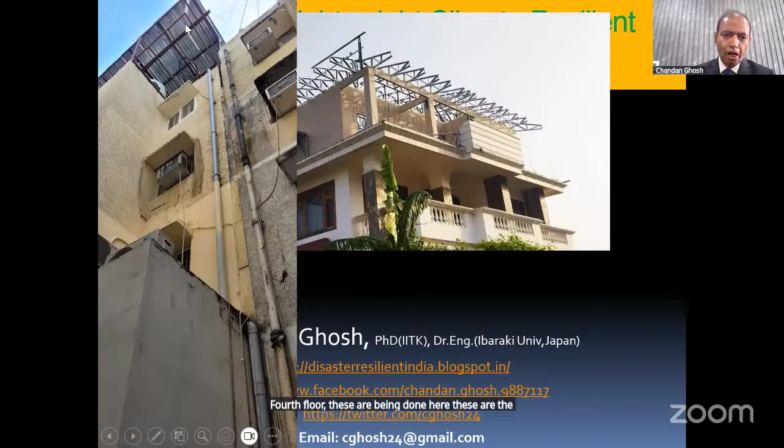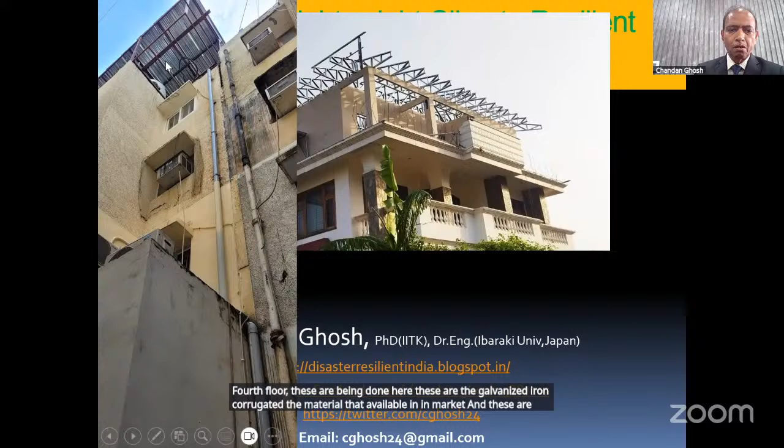Here is an example I'm taking - rooftop means whatever you are seeing over here. Here also, it is at the fourth floor where these are being done. These are galvanized iron corrugated sheet material available in the market, used not only as shuttering but also as a roof.

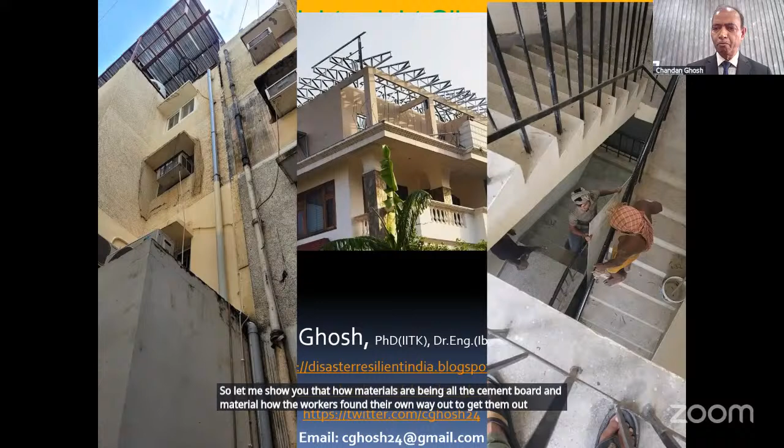Let me show you how this cement board and other material - how the workers found their own way to get them to the rooftop, because from the front side, back side, left side, right side, there is no way to set up a pulley system. So with no other way, they have been bringing this cement board, which is about 10 to 15 kilos in weight, through the staircase, to the rooftop where they have added one floor extra.

After completion, you can see that one floor is added over here, and over that it is a flat roof. And whatever garden and kitchen garden was there is shifted from the floor where this cement board construction is, up to here.

Now let me go to some nature-based solutions that I did myself - I was physically there, in Coorg. This is a portion which had slid, and you can see the building was about to fall down, or it was getting eroded. So we put vetiver grass over there, using the local community and other resources. The date and time mentioned is December 2019, just before COVID.

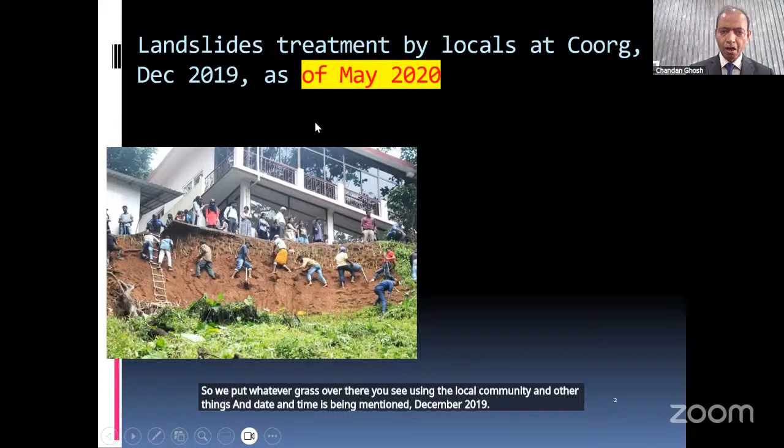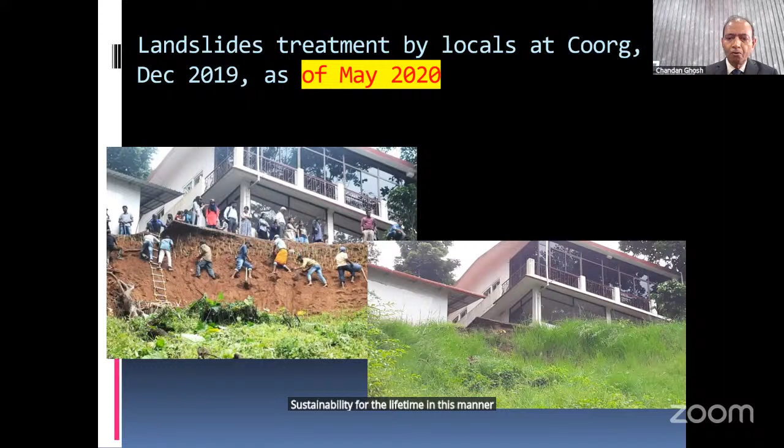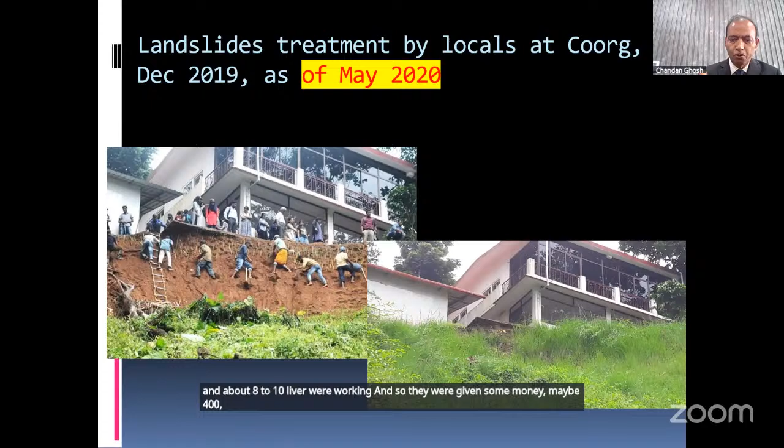As of May, you see how this grass has grown - you can still identify the same building, but see how it has given sustainability for the lifetime in this manner, without spending much money. The grass was donated by somebody, not very costly, and about 8 to 10 laborers were working, given maybe 400 to 500 rupees for 2 hours of work. About 1,000 saplings were planted in this 2 hours, and you see the result - greenery, as well as giving the best alternative to protect this building. Otherwise it would have fallen down, cracked, and everything.

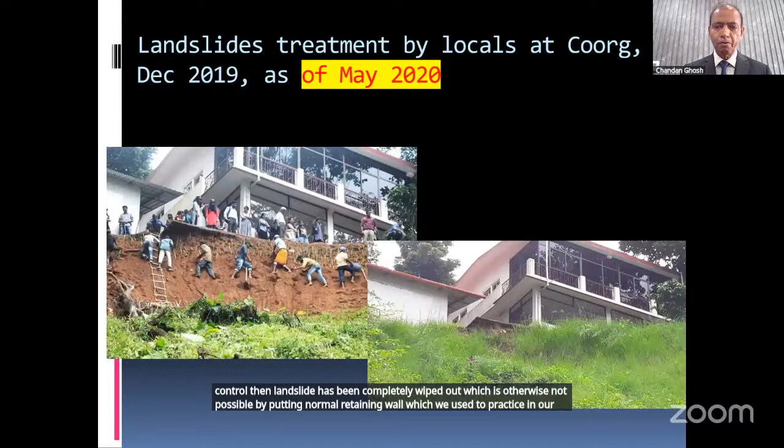So what I mean to say is that this special kind of grass is used to protect this building, which may be costing more than 20, 50, say 30 lakh. But by spending just a few thousand rupees with community help, erosion control and landslide has been completely wiped out, which is otherwise not possible by putting a normal retaining wall, which we used to practice in geotechnical engineering. I want to keep this just for reference.

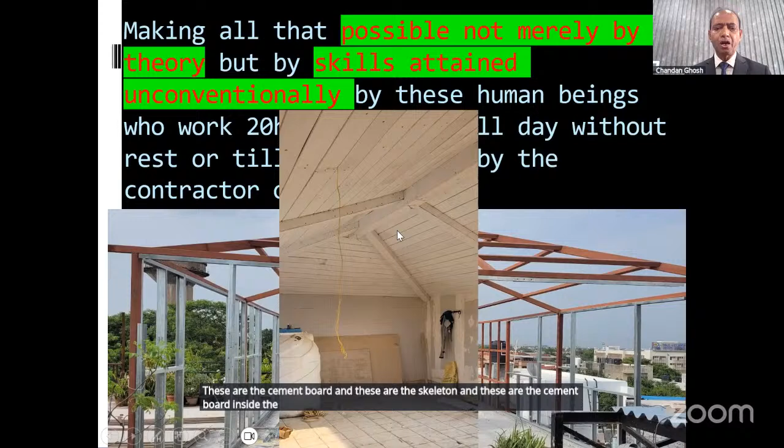And after completion, what is inside is there. You see, it is all cement board. These are the cement board, and these are the skeleton, and these are the cement board inside the building after completion, which took hardly 3 to 4 days to complete.

So while going for rooftop construction, it has to be lightweight, and it has to work in a society where people are already living, so affordability has to be there. It should not be too costly. And there are certain social taboos there, so we have to go not against the taboo, but convince them scientifically how much better it is, and how reliable.

Everybody will ask, what is the cost per square feet, because it depends on site conditions. Especially at the rooftop, it is very difficult. Keeping that in mind, a normal construction in Delhi takes minimum 1,500 to 2,000 rupees per square feet. So this one also costs around 2,000 rupees.

But you get 10% more carpet area. Say for 1,000 square feet, with normal construction, you will get carpet area of about 800 feet. Here you will get 100 feet extra. If you add the cost of that 100 feet, you may see that this becomes cheaper.

So cost, comfort, and no termite issue. It is very fast construction, no cement, nothing like that is being used. It is all welding and cement board, which are customized and available in the market in plenty, made by many manufacturers. Of course, it has to be guided by experts qualified in this field, and you have to choose a contractor or expert who has experience.

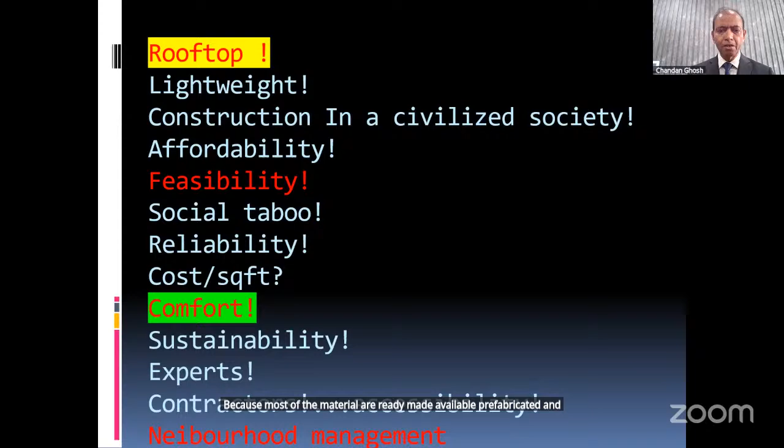Then you can very well manage, because that becomes a big issue. That is why I have highlighted neighborhood management. Because it is fast: a normal floor like this, if done conventionally, will take minimum 1 year, whereas this can be done in 1 month, because most of the material is ready-made, available, prefabricated, and pre-assembled, and only workmanship is required at the rooftop.

So here I want to share something, but time will not allow much. I have interacted with the workers and contractors together for more than 3 months, observing their work ethics and how many hours they work. You can imagine a worker working continuously for 3 to 4 days, 24 hours, taking maybe only 15 or 20 minutes of rest in between. They work 20 to 22 hours a day, meaning they have become habituated to this kind of construction.

But at the same time, you all know how difficult it is to imagine such things done thousands of years back in our country by human beings, constructed from the top, everything in one place. It is a wonder, I mean it is unparalleled.

Now let us see, taking just a few examples, things done thousands of years back, or what I have explained that is recently being adopted by many as affordable and cost friendly. But again, when we go back thousands of years, when so many materials were not available, we do not know, we do not have any connection with how it was made. There is a link between those skills, manpower, and tools that they used, but it is not yet identified.

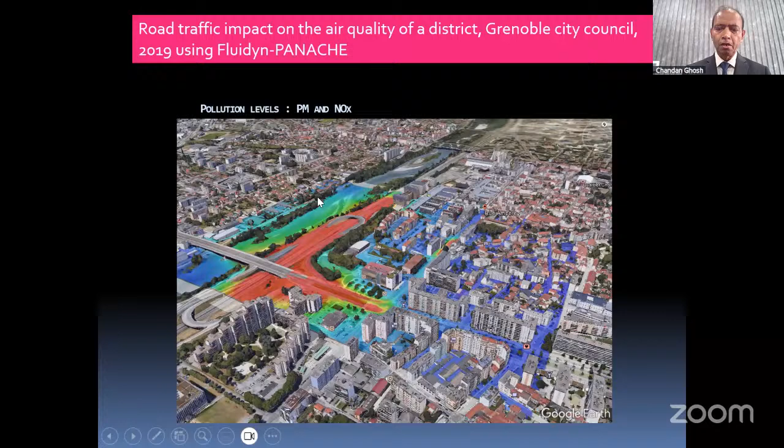We can only imagine. On the other hand, let us go to some of the things we are able to do, like you see, it is in a city area. We are talking about climate change, and we know there are more than hundreds of mobile apps. Taking weather data, we just collate it and show what the climate is today, whether it is going to rain or not.

Somewhere it is going false because we have not modeled them. But we have got the tools here, in the company where I work, so that even knowing how many buildings are there and how many vehicles are there on a particular section of the road, we can categorically identify the AQI, air quality index, or all those parameters along with the sensors placed there. So we can categorically identify which is the most polluted area.

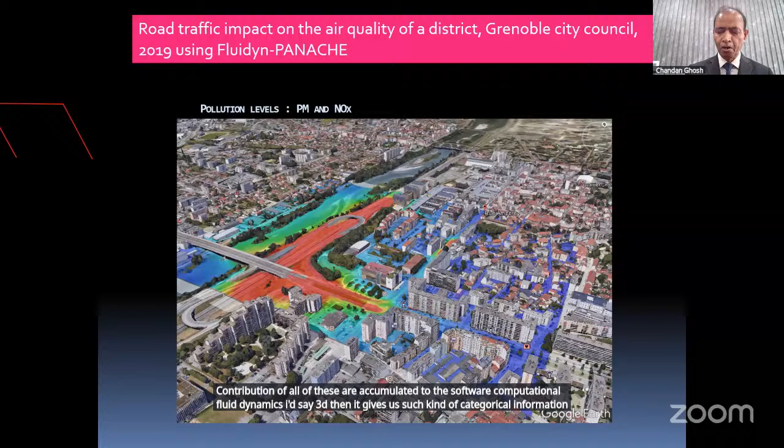And these are all novel exercises, and solvers are available, taking thermodynamics as well as buildings, roads, vehicles, and people movement, like these many multi-towers are there. The contribution of all of these is accumulated into the software, computational fluid dynamics, I would say 3D, and then it gives us categorical information about the pollution load in a society area or whatever you want.

And also this urban air quality, like this is a stadium. Around that stadium, if you want to organize a cricket match where 1 lakh people will be coming, we can give this kind of information in advance: how many vehicles will be allowed, how many people will be allowed. Of course, that depends on the ticket sales, and the time of the event can be decided. And we can give advance information about this 2, 3, 4 days ahead. What are the changes they're going to make?

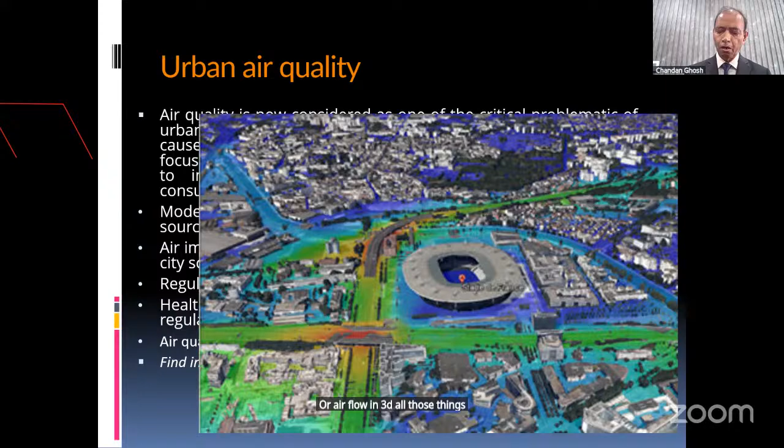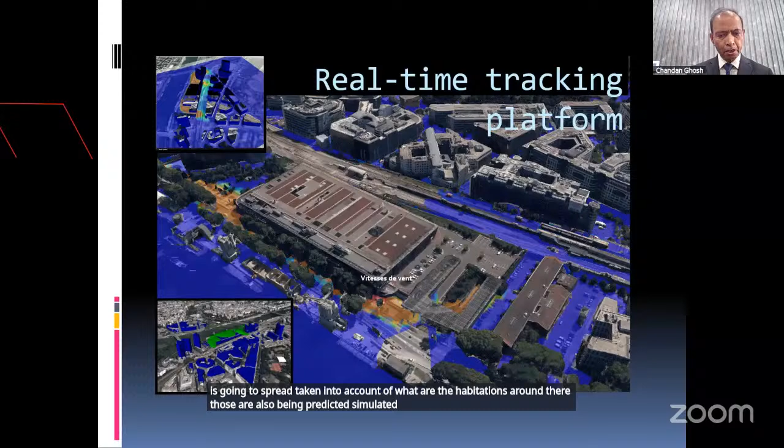Of course, our IMD also gives advance weather forecasting for the next 10 days or long-term forecasting. But this one takes into account day-to-day things, and with computer simulation, we do it more effectively and categorically, and you can verify, you can check, you can put temperature sensors, humidity, or airflow in 3D. All those things can be taken into account, and we can predict. Or when there is a fire in an area, how it is going to spread, taking into account the habitations around there. Those are also being predicted and simulated using the multiphysics domain.

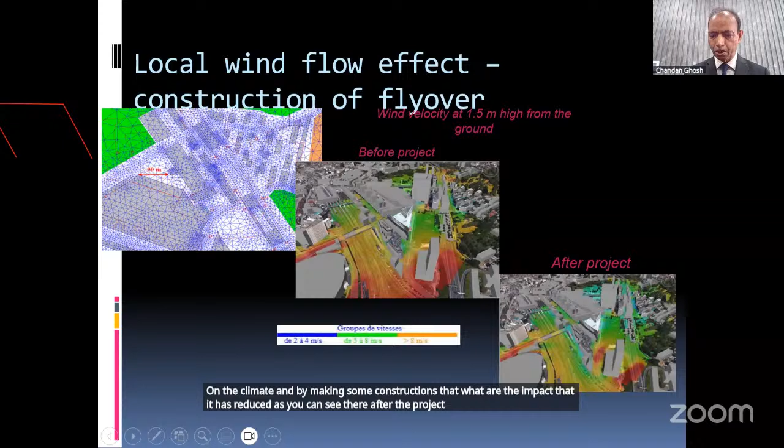Then suppose these are the discretizations that we do in our civil engineering. Suppose there is some pollution over here, and whenever some flyover or underpass is being made, before the project and after the project, what are the changes? So we can categorically see what is the impact on the climate, and by making some constructions, how much it has reduced, as you can see after the project with this color code.

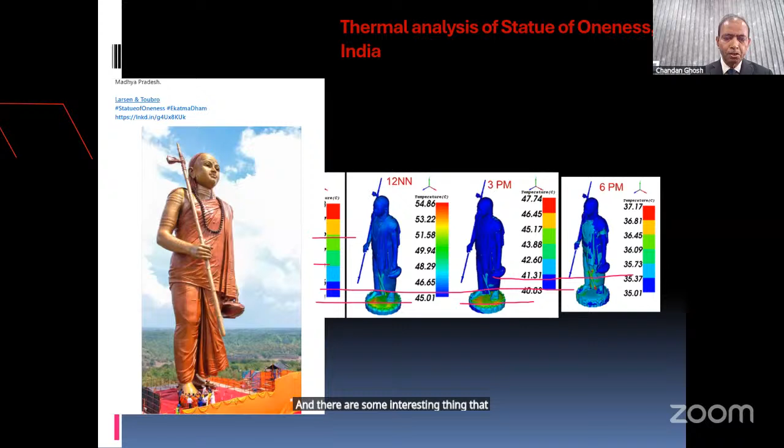And one very interesting example is the statue. L&T has made the Statue of Oneness, and the statue is like this. So we did CFD analysis on the entire statue, and here you see at 6 a.m. the temperature is 30 degrees maximum. At 9 a.m. that temperature becomes 41.33. At 12 noon, it becomes 54.86. At 3 p.m., it has reduced. At 6 p.m., it has reduced. This one indicates the head here. And this gives the distribution of temperature throughout the statue from top to bottom.

So these are the kinds of analysis which are not easily taken up in the structural analysis of such a statue by the structural engineer. But when sun heat and temperature are taken into account, the variation of temperature can easily be measured, identified, projected, predicted, and the change that happens when temperature goes from 30 degrees to 54 or 55 degrees: what will be the impact on the statue, on the material being used, whether it is designed for that or not. If it is not, then what mitigation measures are to be used? Say some cool liquid may be circulated at the top, so that we can keep a balance and temperature extremes are not there.

So I mean to say that in the climate change and disaster mitigation area, we have been using many empirical estimates, statistics of 30 years, 40 years, projecting them for the next 70 years. But all these things are based on statistical information. Whereas here we are taking into account the multiphysics of each and every mechanism, how temperature is going to interact, and then we are able to give this level of discretization of the temperature variation, and what impact it will have on the statue itself, on the life of the statue for which it is designed.

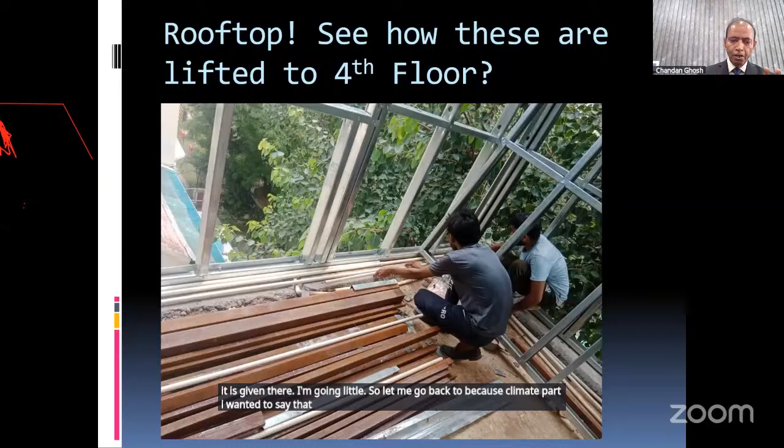This can be categorically explained. And this is from the company side, it is given there. I'm going a little fast. So let me go back, because on the climate part, I wanted to say that we are using statistical information, projecting it for 2070. We are now taking into account, say, net zero by 2070 in India, or how it is going to change in the next 100 years.

In the recent events that are taking place, it is not going to be dependent on what the last 5 years of information is. We have to use categorically some kind of analysis like this, which takes care of each and every part, from kilometer size to even millimeter size discretization, so that we can measure, we can project, we can predict, and we can make some mitigation measures.

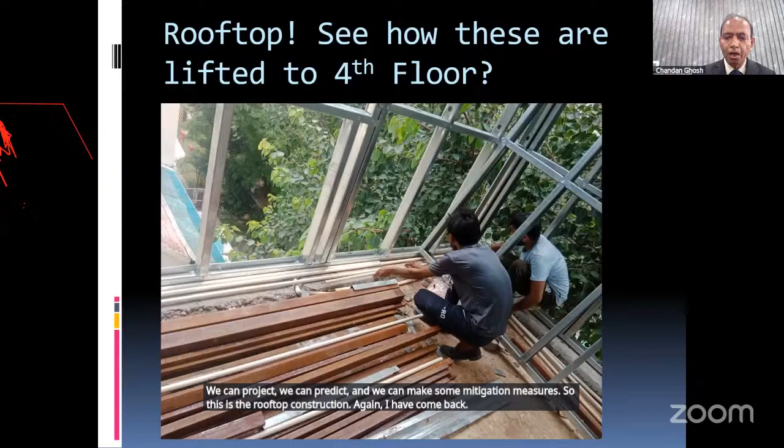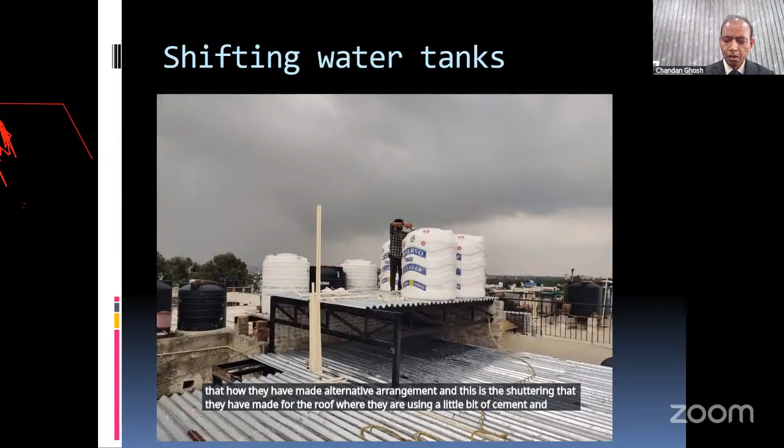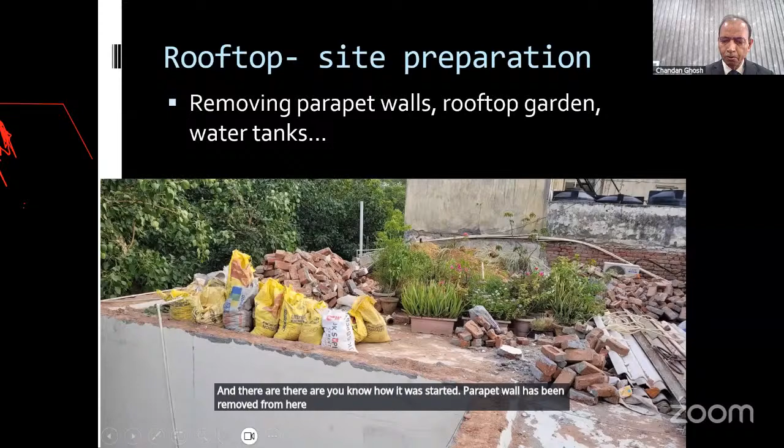So this is the rooftop construction. Again, I have come back to how they have been constructing this in various phases. I'm going a little faster, how they have made alternative arrangements. And this is the shuttering that they have made for the roof, where they are using a little bit of cement and concrete to make the floor, a flat floor. And this is how it was started. The parapet wall has been removed from here. And you see the tie beam has been put up. See, all the parapet, and these are the tie beams put up over there.

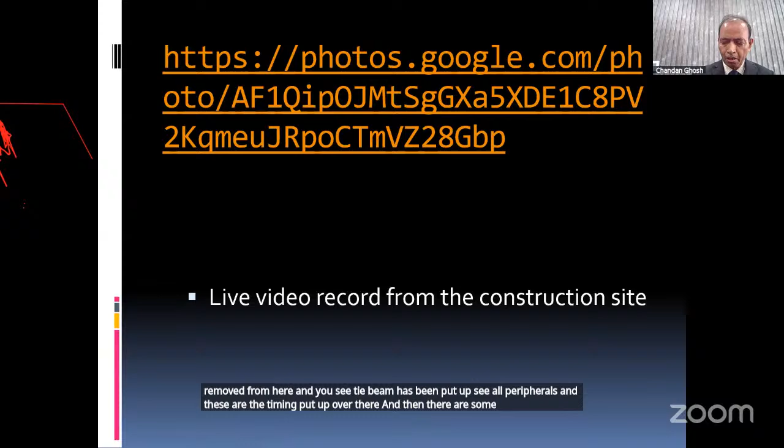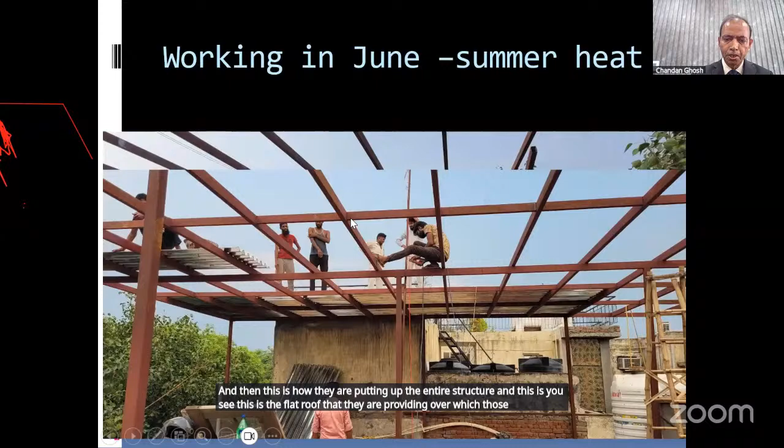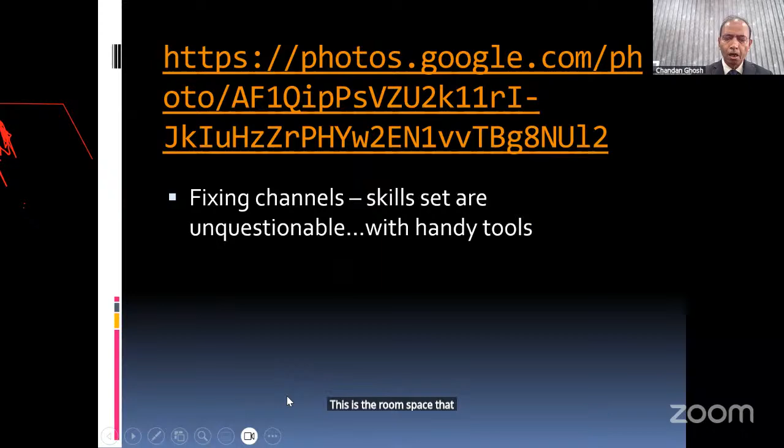And then there are some live videos, but because of the shortage of time, I am not showing them. But these are the kind of connections that they are making, welding especially. And then this is how they are putting up the entire structure. And this is the flat roof that they are providing, over which they are using those tin sheets. And these are the works going on. They do it very fast. And then they have done the concreting over this. This is the room space that they have created. And all the material they have carried manually through the staircase, and all this work that they have done.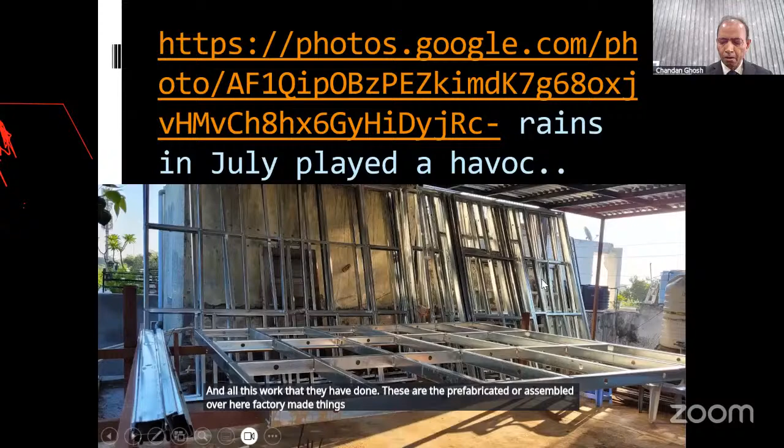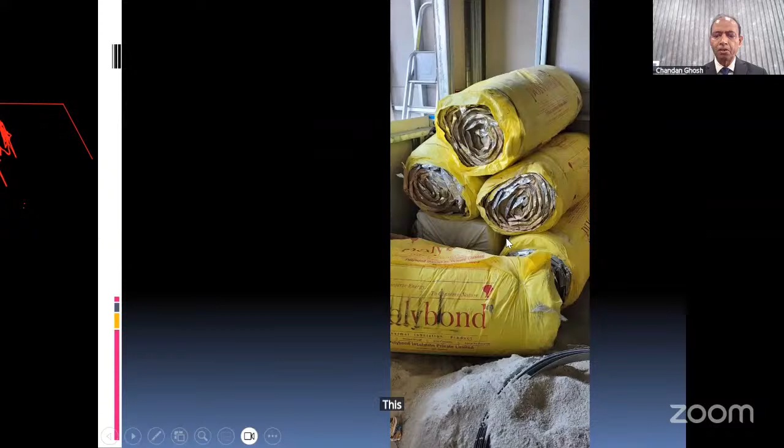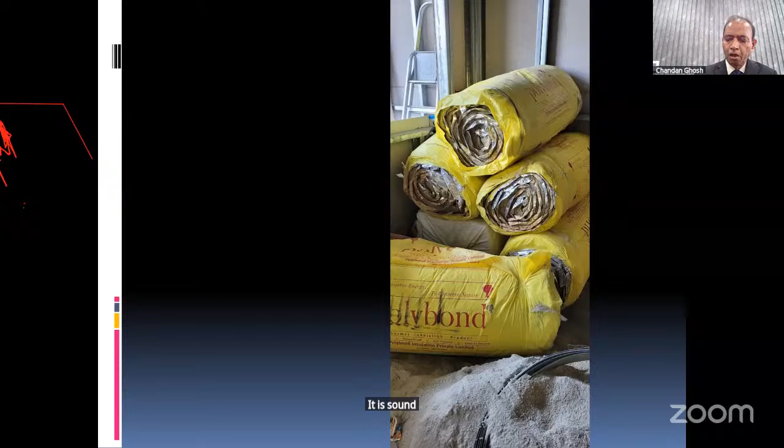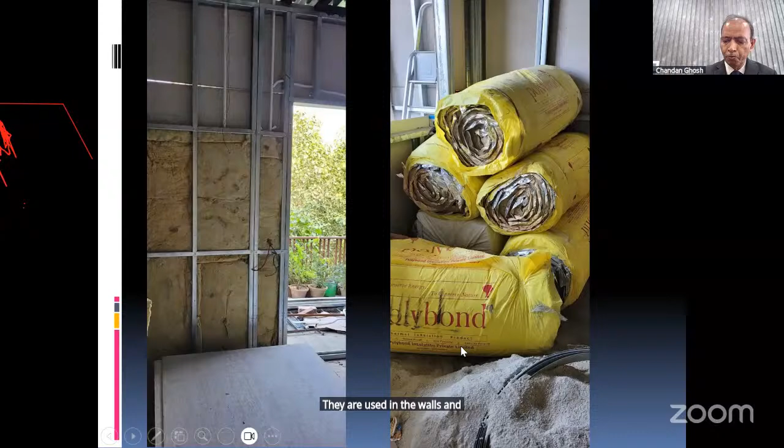These are prefabricated or assembled over here, factory-made things, galvanized iron, which they have used as a wall. And there are many videos. These are the glass wool that they have used. This glass wool they have used in the entire wall so that they can reduce the sound effect by 40 decibels. So it is temperature proof, sound proof, dust proof, and noise proof, rather you can say. They are used in the walls, pasted over there, and then with cement board they have made everything. So in 3 months of time they have done it. And of course, I'm going to send all these after this, so you can see.

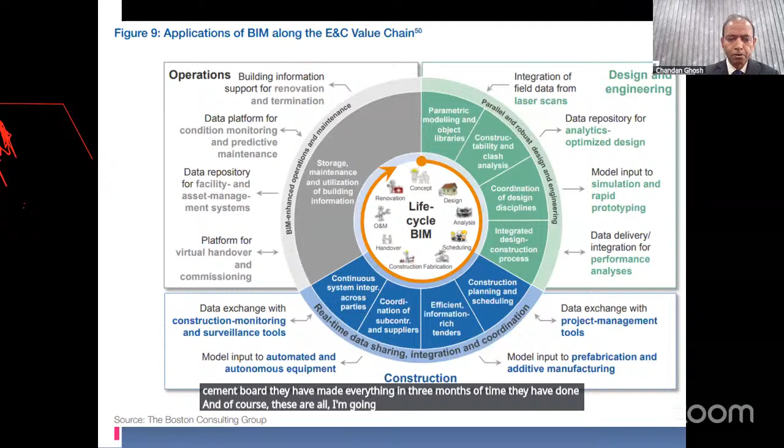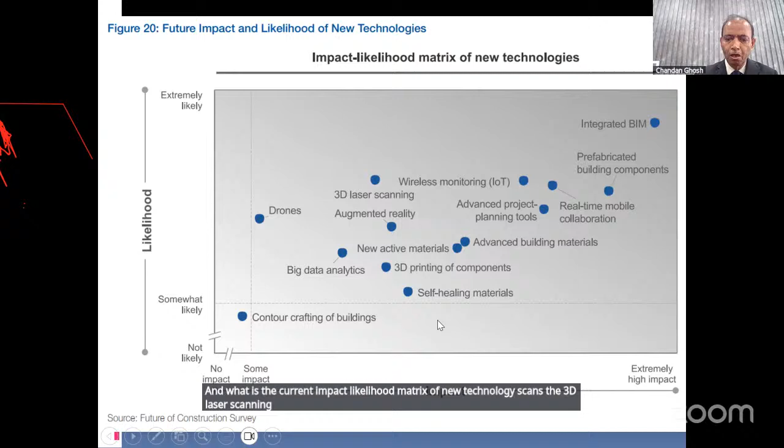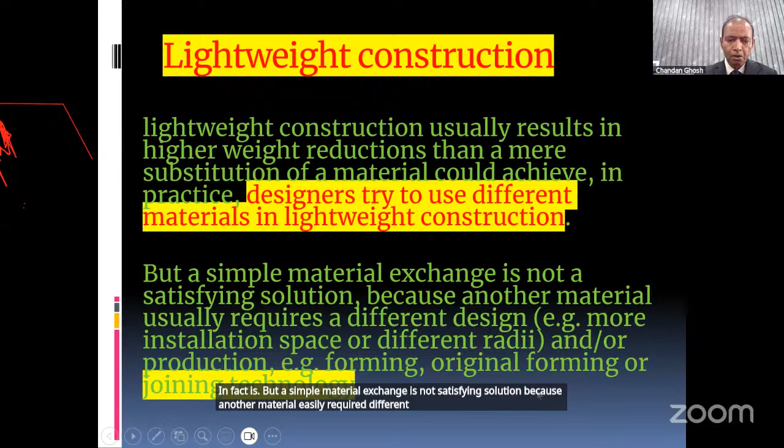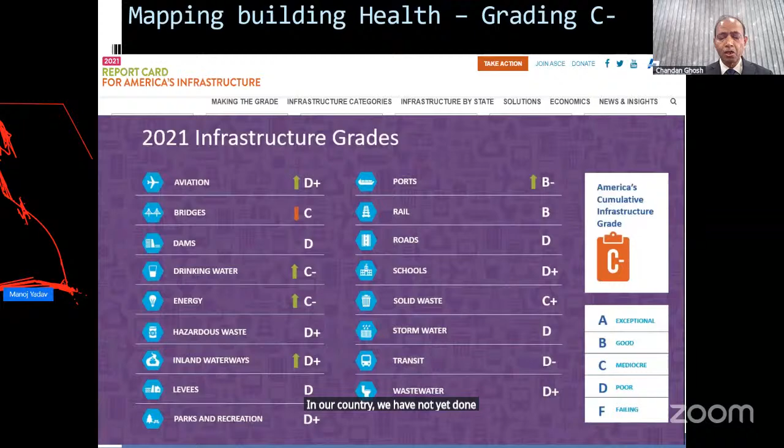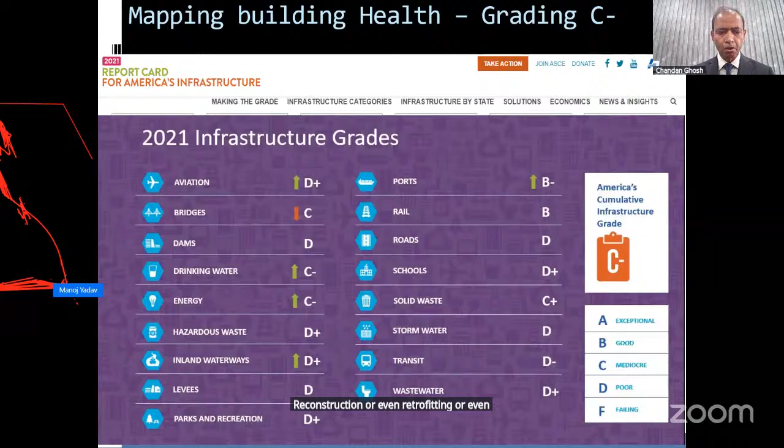In our country, we have not yet done such kind of infrastructure health mapping systematically, although in America they started in 1988. Every 3 to 4 years, they do such a survey so that the government can allocate a certain budget for reconstruction, or even retrofitting, or even removing, or adopting new technology and many things.

Yesterday, in fact, I visited a place in Moradabad. Here you can see the things. This is the talab, you can say, which was cleaned initially for 1.5 years, from May 2022 to November 2023. For 1.5 years they cleaned it, and now that cleaning is continuously going on.

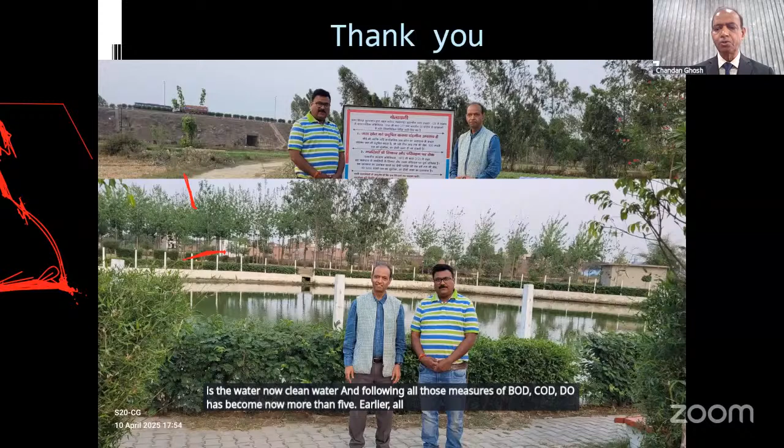And this is the condition now: it is so clean, with greenery and everything, at a very, very low cost, in situ. I'm not able to show the before photo just now. Here it is the water now, clean water. Following all those measures of BOD, COD, the DO has now become more than 5. Earlier, all were 0, and there was no water at all. It was all full of muck and water hyacinth. Now it is clean water.

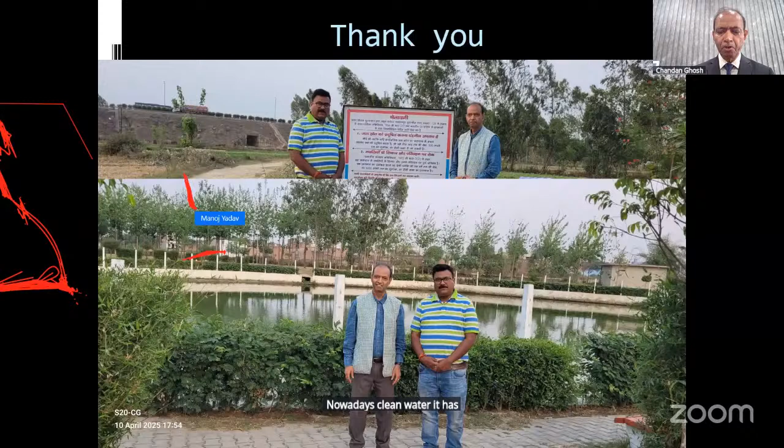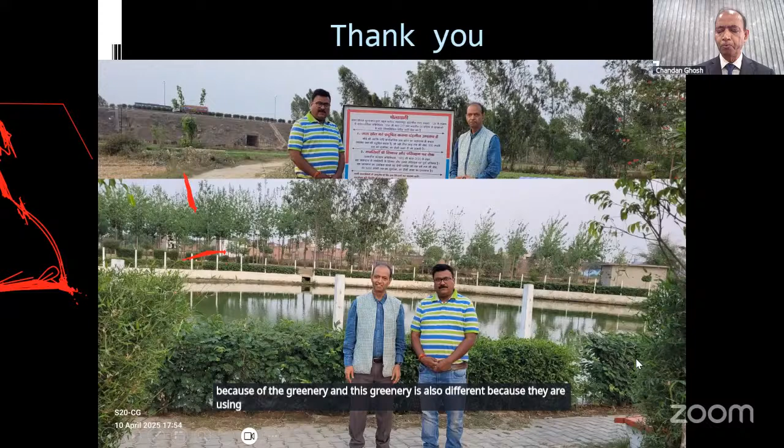It has become a very, very cool breeze. In fact, when I was there, it was around 5 o'clock. It was so soothing because of the greenery. And this greenery is also different because they are using this water only. They have done several such projects. I used to visit them, see, and appreciate them.

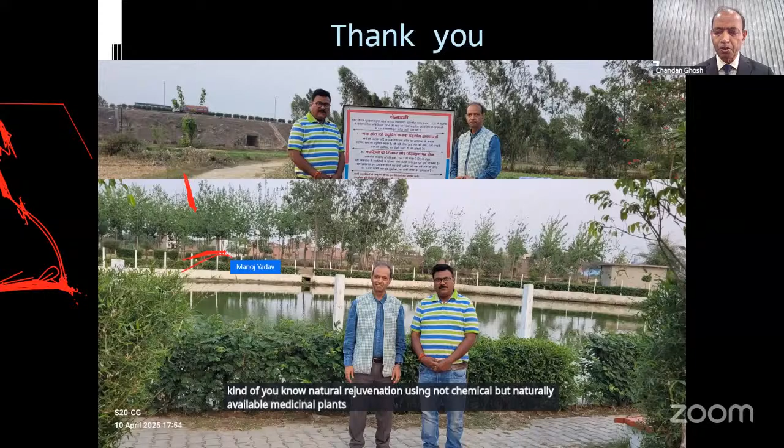But with one such project and the impact it has created, I think a scientific body has to take care of social impact assessment. Let me appeal to all of you, please come forward for impact assessment of such natural rejuvenation, using not chemicals but naturally available medicinal plant extracts available in our country, so that we can make such change.

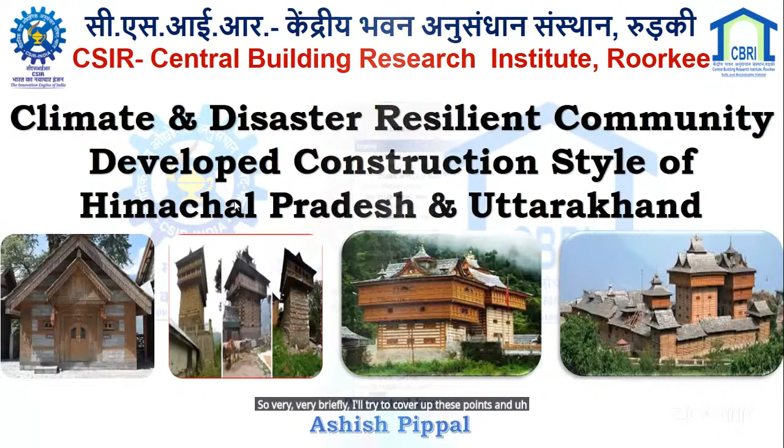To give you a glimpse of what the problems basically are: India has been divided into various geoclimatic zones, along with geohazard regions. You can find all the hazards, all the types of geoclimatic issues that any part of the world can have, in the country. We have storm affected areas, flood affected areas, droughts, deserts, both hot and cold. We have landslides, rock falls, avalanches, cyclones. And along with that, obviously, there is temperature variation.

In the Leh region, the temperature is going well below, let's say, -30 or so. And then in the region of Kutch and many parts of Rajasthan, it's going well beyond 50, 52 as well. Nowadays, it is touching approximately 52. So we are having a wide variation of the geoclimatic conditions as well as the geohazards.

So based on all those aspects, it was a necessity for the people to survive under these extreme conditions in the earlier days. And there were very limited sources of transportation and all those kinds of things, so they had to rely on the local materials that were available there in the vicinity. And so, with the help of those materials, they did the hit and trial.

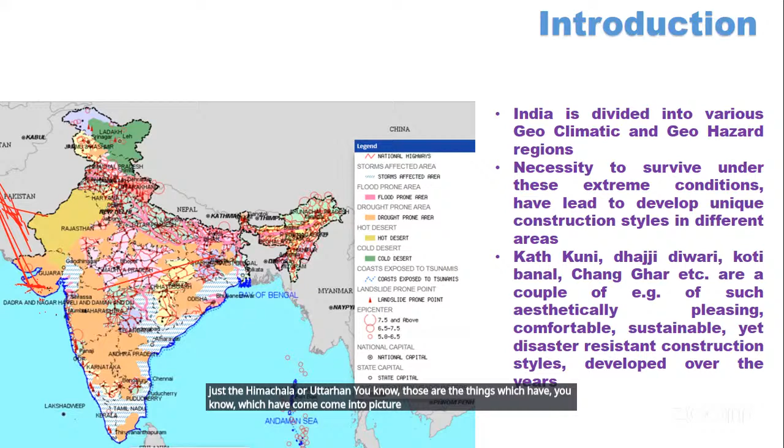So just to give you a glimpse about what Himachal Pradesh is actually facing. You can always see that there are landslide prone areas in Himachal. Many of the areas of Himachal are landslide prone. Every year, whenever the rain takes place, a number of landslides occur. Because of that, a number of houses get destroyed, or it affects the infrastructure, and all those kinds of things happen.

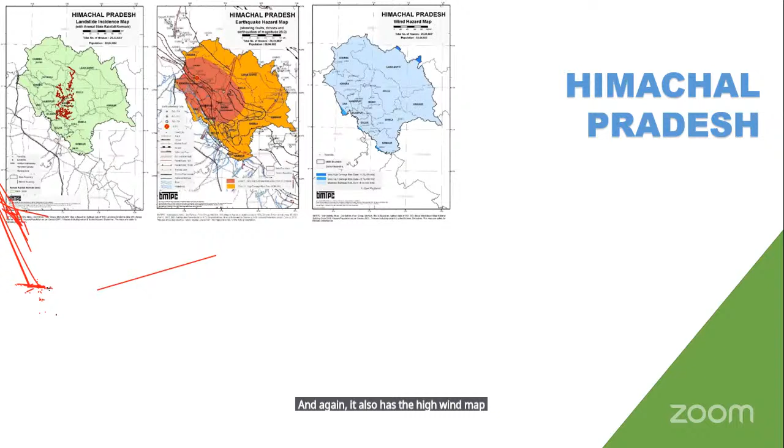And along with that, the earthquake hazard map, if you look into it, from the current BIS code point of view, it falls in zone 4 and 5. And again, it also has the high wind map. It has got very high winds blowing from 39 meters per second to 50 meters per second, and so on. And along with that, Uttarakhand is also having similar types of issues, like the wind.

It has got wind hazards. It has got the landslide issues. It also has got the earthquake issues. So the situation or the condition of Himachal Pradesh or Uttarakhand, or the nearby states of Himachal or Uttarakhand, also has similar issues. And so the solutions that came out were also a bit similar in nature.

Again, just to give you an idea of what kind of disasters these states face. So just in Himachal, in just 2023, these are the data of the 12 districts. And so many houses, let's say, 964 cattle sheds got destroyed in Bilaspur, and 1577 in Mandi. So thousands of houses got destroyed in just 1 year of flooding. Just one flood, and all these houses got washed away.

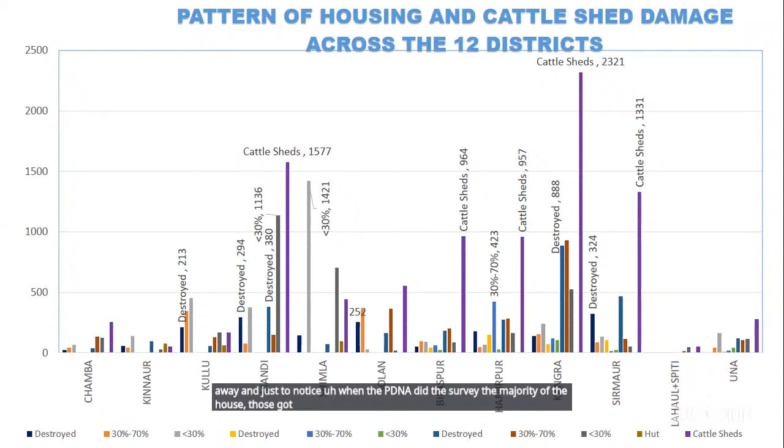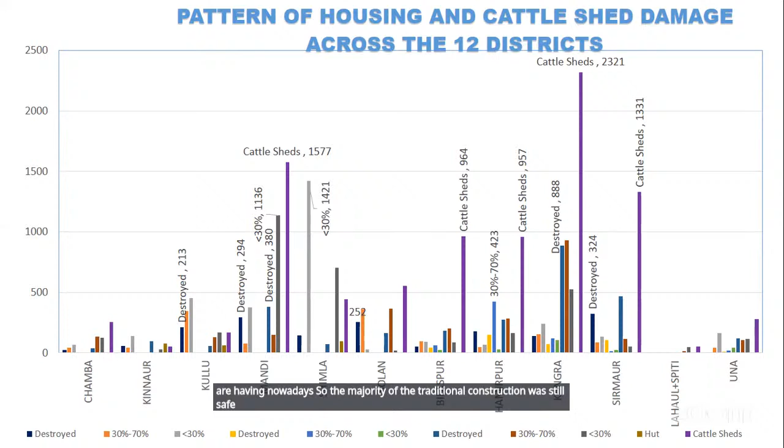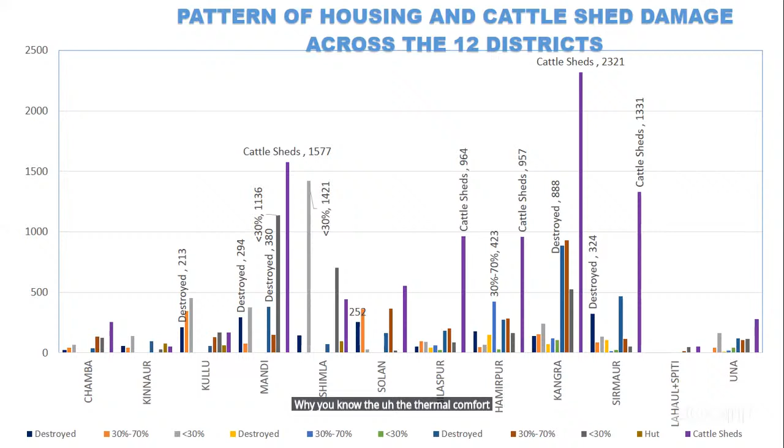And just to notice, when the PDNA did the survey, the majority of the houses that got destroyed were actually the conventional construction, the modern or contemporary construction that we are having nowadays. The majority of the traditional construction was still safe. So that brings us to look into why such things are happening, why the thermal comfort or the disaster resiliency of the traditional constructions are still better, and that still needs the attention of people, and we need to intervene into that.

So regarding the construction techniques that we are going to discuss here, Himachal and Uttarakhand have many kinds of construction techniques available traditionally with them. Let's say Kath Kuni is there, which is a construction of wood and stone. Then there are mud houses with slate roof. Thathara style is there. Dhajji Diwari is there.

Then there are mud houses with flat thatch roof, and the slopey thatch roof is also there. Mud houses, normal mud construction. Then there are dedicated stone construction, brick and random rubble in mud mortar, dry stone. Sun-dried bricks are there. Mud houses in high Himalayan region, random rubble construction, and all those kinds of things are there. But all these are specific.

They were not constructed like nowadays, where just one solution is getting fitted everywhere. That was not the case earlier. People used to construct in a particular style at a particular location only, because they were aware of the situation, how the climate is going to be there, how the hazard situation is going to be at that location, and accordingly the construction used to take place.

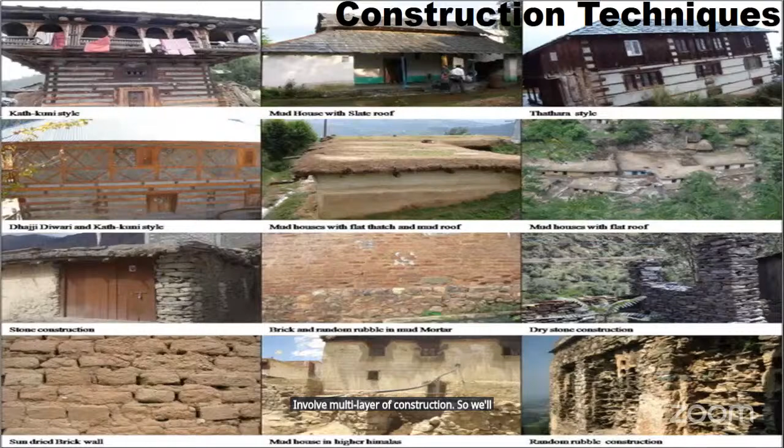So right now we'll be just talking about the Kath Kuni or the Dhajji Diwari, because the other construction doesn't involve multi-layer construction, and the time restriction is also there. So Kath Kuni actually has a recorded history of more than 1,000 years, though it's saying 880 plus minus 90 years. This is something which has come from carbon dating.

So we have a structure which is as old as 1,000 years, and the material it is using is basically wood and stone. Very specifically, they used wood which was deodar, and the stone which was sandstone. Though Uttarakhand and Himachal have a variety of stones available, these were the typical wood and stone that they were using in this construction. The wood was specifically deodar, though cheed is also available, but there was a specific reason for using deodar as well. We'll be discussing that in the upcoming slides.

And if you look into the floor plans, you'll observe that there are ventilations, but if you look into the elevation, the ventilation sizes or door sizes are very small, because they were aware that we need to trap the heat inside. We just cannot allow the cold weather outside to get inside and bring the room temperature down. So they used to keep minimal ventilation.

At the top floor, they used to have multiple ventilations, but that was because they used to open them during the daytime to soak the sun, and as the evening approaches, they used to shut them down. So that's how they were aware of how they need to construct their houses. And all these houses are very regular in elevation. There was symmetry in plan. They were not very lengthy in construction.

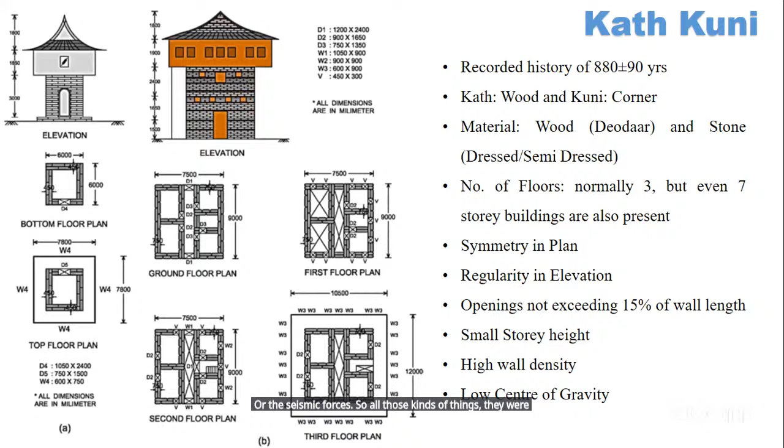So they had sufficient ductility, sufficient flexibility, as well as sufficient rigidity in their houses, and the overall thermal mass was also being provided, as the minimum wall thickness they used to keep was 450 mm.

Whereas this was for residential purpose, if we were talking about temples and other structures important to the community, the wall thickness they used to keep as high as 800 to 900 mm. So they were actually aware of how much heat needs to be trapped inside.

Now there's another type of construction which is very prevalent, called Dhajji Diwari, a typical timber frame construction of the Western Himalayan region. The speciality is that the superstructure remained anchored with the foundation. They used to lay a beam once the foundation was laid, and that beam connected with an anchor with the foundation beneath, and this anchor connected with the columns at the top. So the superstructure was connected, and it was a braced construction taking care of all the seismic forces.

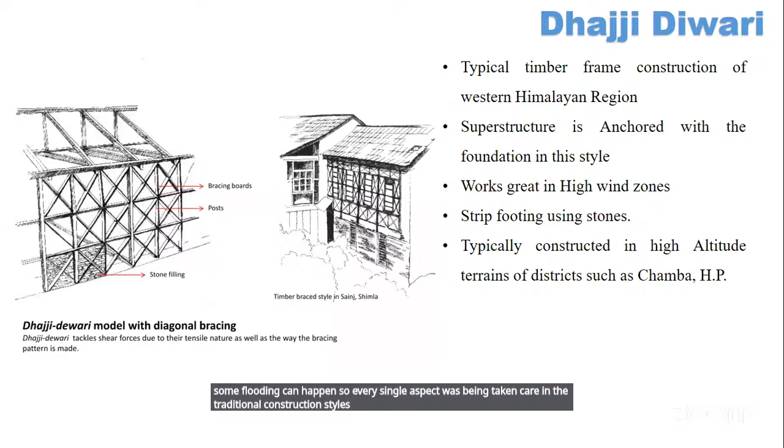This is a typical diagram of how construction takes place in the Dhajji Diwari type. The houses are typically 1 to 4 stories tall, and the roof is made of flat timber, or sometimes metal sheet at the top floor, or slate roof. The floors were typically laid on timber beams. This was basically timber construction in which Deodar was used because of its many specialities.

So as we discussed, the materials they were using were simply stones, soil, or wood - materials very easily available at all these locations, and with these simple materials they were constructing these building marvels. Stones have very high compressive strength and are easily available in hills. In the Kath-Kuni style, they used typically undressed or sometimes semi-dressed stone. To dress these stones, they used to boil them first in huge containers, and then after boiling, they would chisel them.

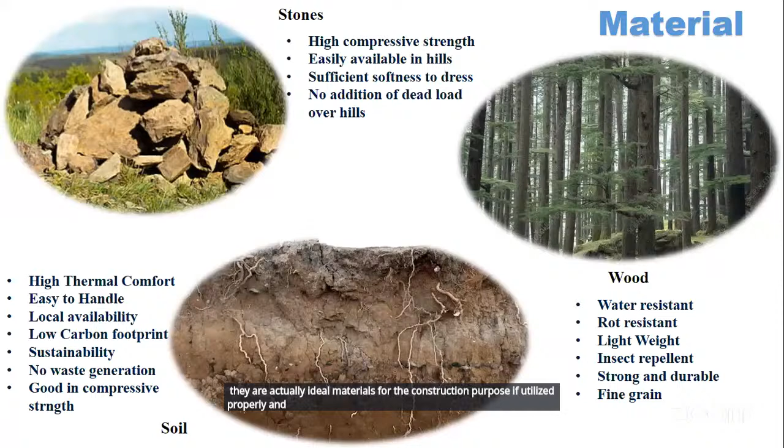If you look into soil, it again has very high thermal comfort and is easy to handle. Locally, it's very easily available, carbon footprint is almost negligible, and these materials are sustainable. Waste is not at all generated, it's completely biodegradable, and if you're not putting water in it, it has very good compressive strength. So all these materials are ideal for construction purposes if utilized properly, and those people in the traditional style were utilizing it just perfectly.

So, Mr. Ashish, can you summarize? Yeah sure, yes, there are just two slides I'm left with, so I'm just summarizing it.

Basically, if you're looking from the community perspective, the people were not taking any external help, they were constructing on their own. Right now, in contemporary construction, the community is purchasing material from one small agency or one particular firm, and many people are adding economical expenses onto that.

Whereas if you try to look into the other aspect, where traditional material or traditional styles are used, it's like upside-down pyramid, and people get more benefited, because the material will be local, the labor will be local, and everything will be local economy, and the ecosystem will be generated. So earlier, people had no external help.

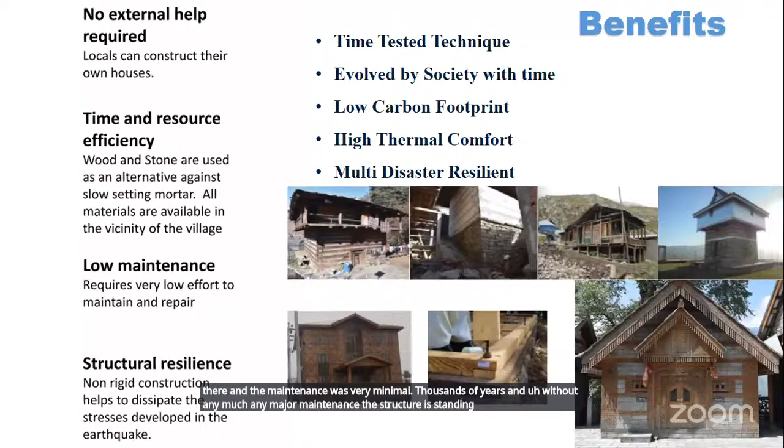Time and resource efficiency was there, and the maintenance was very minimal. For thousands of years, without any major maintenance, the structure is standing, and the structural resilience is very good. These are all time-tested techniques evolved by society with time.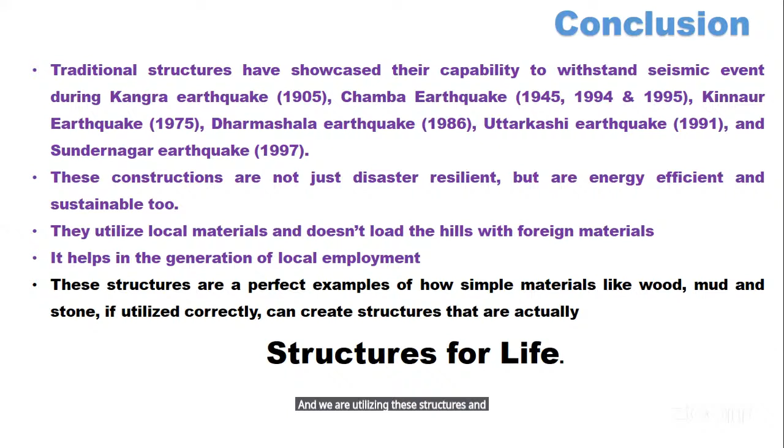To conclude, these structures have showcased their capability in various seismic events which have taken place in the past. These constructions are disaster resilient, and at the same time energy efficient and sustainable. If we utilize these structures and materials in a nice way, they can create something which is called structures for life. So that was it, thank you, and Jai Hind from my end.

Thank you so much, Mr. Ashish, for such an enlightening and engaging presentation. This session has reminded us that climate resilience does not always need to come from high-end technology. Sometimes it comes from looking back, learning from communities who have coexisted with nature for centuries, and thoughtfully integrating these practices into our future planning.

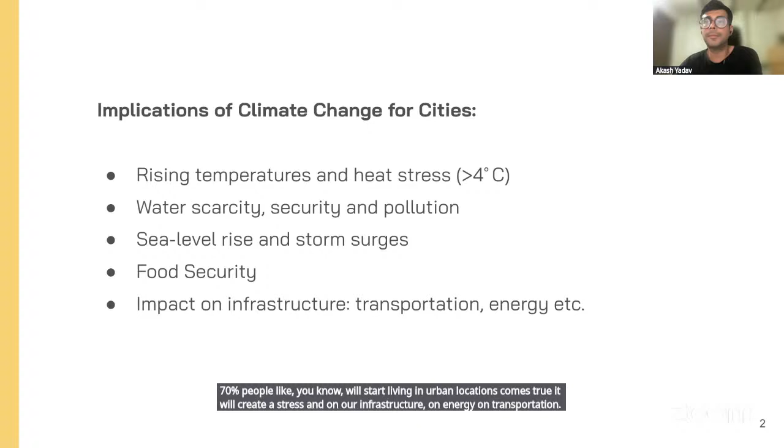And what happens when the UN estimate that 70% of people will start living in urban locations comes true, it will create stress on our infrastructure, on energy, on transportation. So clearly something we need to think about as these problems are increasing in almost near real-time capacity.

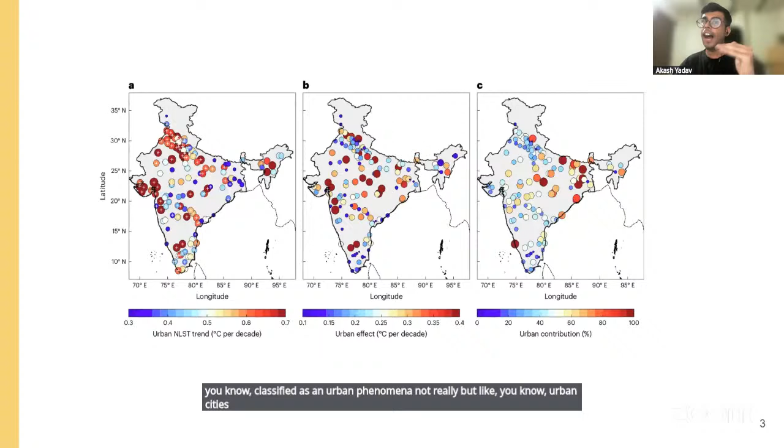Over here in this slide, I want to draw your attention. You might ask whether everything related to climate change can be classified as an urban phenomenon. Not really, but urban cities are at a higher risk than other counterparts.

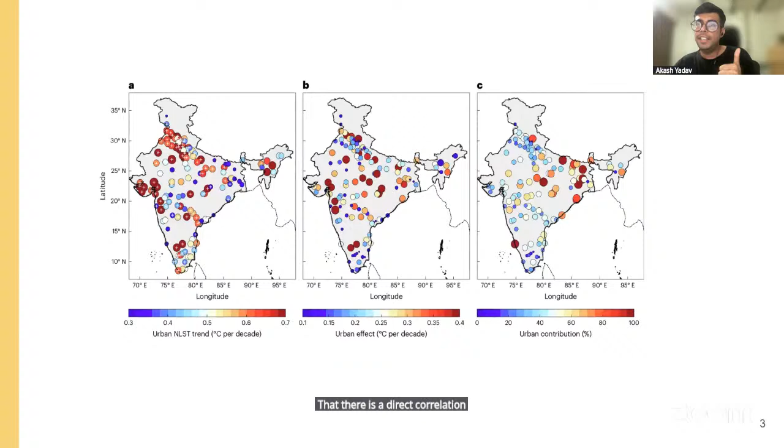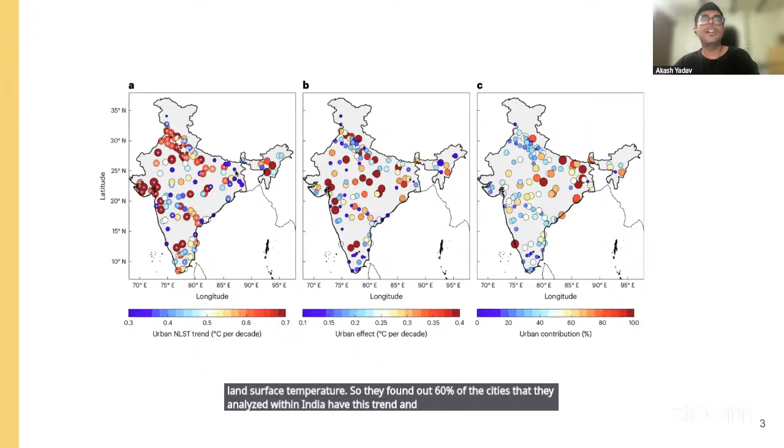The reason, as demonstrated in this research by researchers at IIT Bhubaneswar, if I'm not wrong, is that there is a direct correlation between the degree of urbanization and the land surface temperature. They found 60% of the cities they analyzed within India have this trend. The red dots you see on your screen are basically cities that have exhibited this trend. The redder the dot, the more statistically significant the result is.

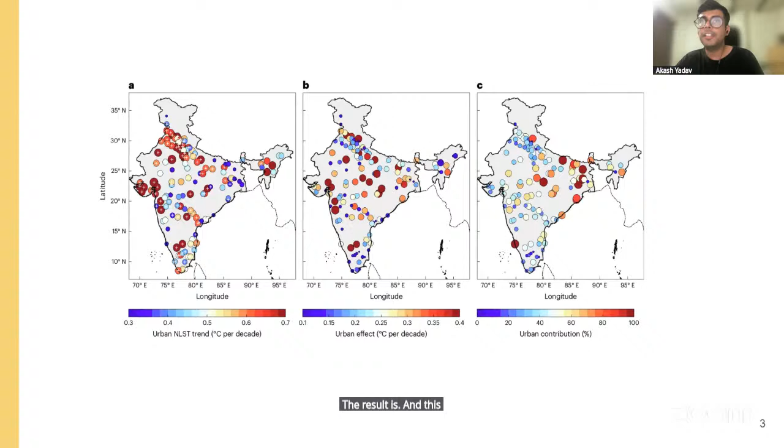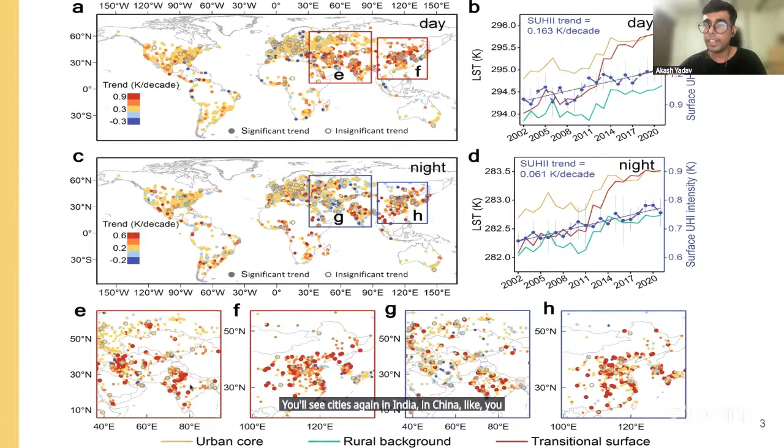And this is not just a problem with Indian cities, this is a problem with the world at large. In a similar study of about 2000 plus cities, it was found that urban areas are heating 30% faster than their rural counterparts, and the problem is much more accelerated in the South Asian context. At the bottom, you'll see cities again in India, in China, at the verge of being these red dots, and redder by the moment. So it is clear, right?

The current challenges that we face around climate change, they are accelerated from a city perspective, from an urban context. And South Asia is clearly ground zero for some of these problems. And the world is looking upon us, right, in terms of trying to find the solutions in terms of climate mitigation and adaptation. And some of these problems are happening in near real time. So the solutions need to happen in near real time.

The way to facilitate this, as I will show, is through data-driven solutions. Data-driven solutions can have a significant impact in reducing the turnaround time when it comes to these analytical questions that we ask in terms of what is possible around adaptation and mitigation, and how do we productionalize it, or how do we make sure this is within the decision-making capacity of the end user.

And in the examples that we have worked through in our experience, there'll be many cases where a cyclone these days can be predicted with 90% accuracy on where it is going to make a landfall. We know what kinds of population estimates are going to be impacted. In some cases, it is also possible to know the medical vulnerabilities within these areas. So all of those combined, we can target very dedicated resources, aid, when it comes to response and rehabilitation within the communities that are impacted.

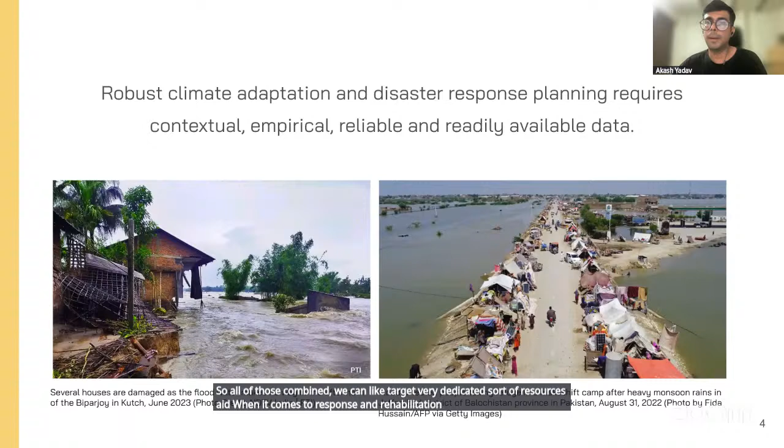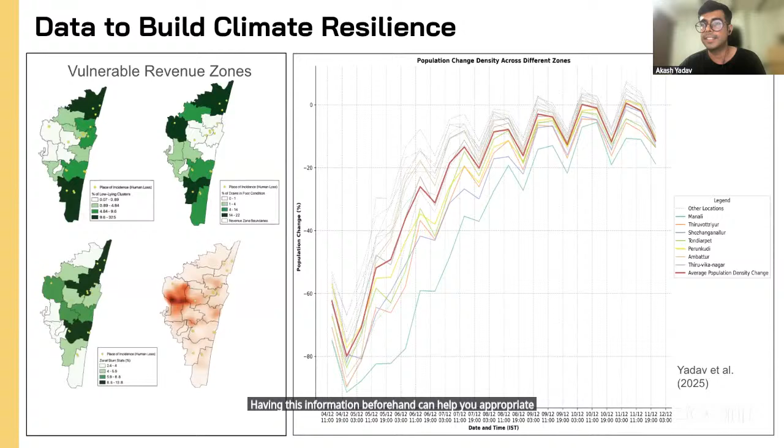So this is a great insight in terms of preparing for what kinds of anticipatory measures can be taken. Having this information beforehand can help you appropriate the kind of resources that are necessary for these revenue zones to absorb future potential shocks.

But this effort is not an easy one, especially because of the state of the data sets that currently exist in the public domain. Some of the challenges of data sets that are publicly available include that they are incomplete, they're not frequently updated, they're inaccurate, they have undercounting in them. Sometimes they also have double counting.

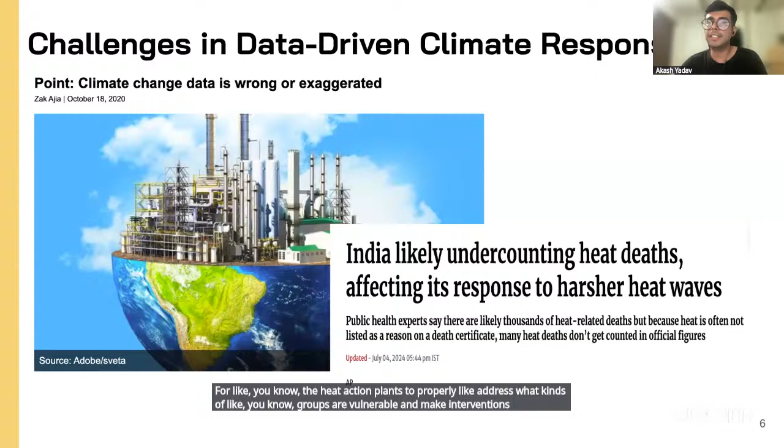So if I can draw your attention now to this particular right side headline, India likely undercounting heat deaths affecting its response to harsher heat waves. So this clearly has major ramifications in terms of what kinds of interventions are necessary. If we are grossly underestimating the deaths, we can't plan the capacity that is needed within hospitals for the heat action plans to properly address what kinds of groups are vulnerable and make interventions personalized to their experience. So that's something that we are lacking, and this can misclassify or misappropriate very important risks.

So imagine you have a dashboard where there are several districts where you're highlighting the vulnerability, but you miss out one district where you're saying there's no vulnerability as such. But given the evolving nature of these vulnerabilities and extreme events just intensifying, even this district for some reason might be vulnerable in this current year, and you're completely missing out on that insight, and you're not releasing the right kinds of funds or resources that are needed for that particular district, and that can have very severe consequences. So we need to avoid that.

The data that goes into the models needs to be accurate, or needs to have some kind of guardrails that we can accommodate and then use in our models. At AIDMI, we also did a stakeholder consultation of about 100 individuals around disaster risk reduction, climate adaptation, and humanitarian action, just to document what are the common problems facing the repositories that have climate and disaster related data.

The first and foremost has been the existence of data. This is a very common problem, that the data just doesn't exist, right? And I'm talking about very specific community data, where it is of a high spatial resolution, temporal resolution, updated frequently. So you just don't have those data sets to identify what are the risks and vulnerabilities.

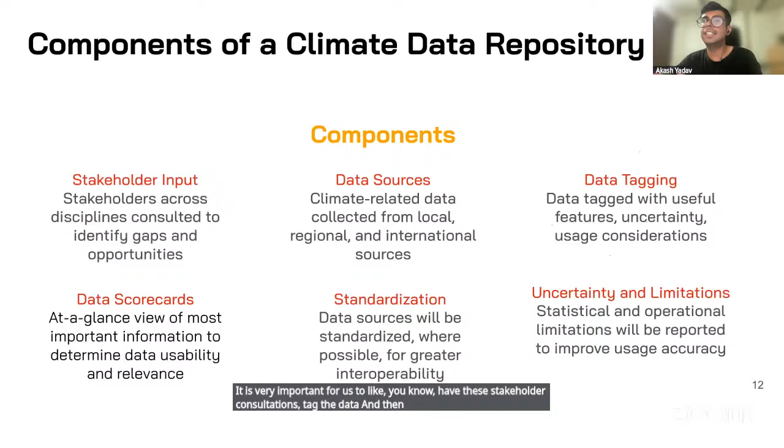Again, in order to build a very resilient climate data repository, it is very important for us to have these stakeholder consultations, tag the data, and then standardize it in a way that is easily accessible to the end user. This is an example of what a repository of such nature will look like.

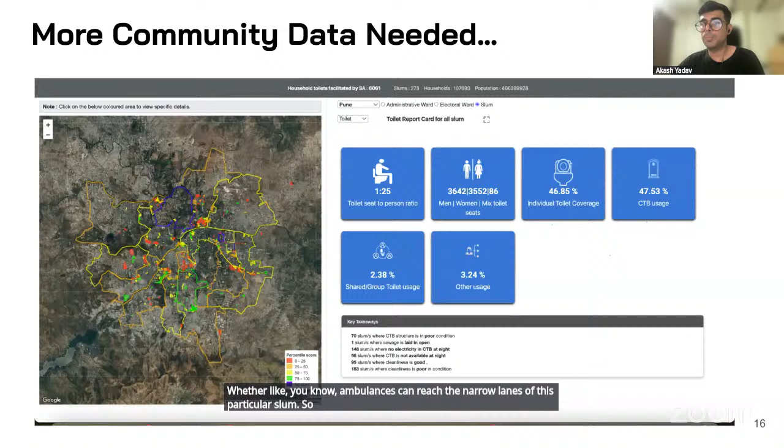And this is an example of an NGO called Shelter Associates, who has provided slum level data. So they collect data of each citizen within a particular slum, and they also capture important details about the infrastructure within that slum. And they're not releasing personal data. They are only releasing the characteristics of that particular slum, which is still important for me to plan if some kind of service delivery needs to happen, whether ambulances can reach the narrow lanes of this particular slum. So all of that is possible when you have data in this capacity.

Right. So this brings me to an end. Clearly, a need exists, and we need to be able to service that need. Data infrastructure is improving, so all of us should contribute important data sets for climate adaptation and intervention research to finally materialize. Thank you.

Thank you, Mr. Akash, for shaping our understanding on climate resilience through data infrastructure. So with this, one thing is clear: closing the climate data gap is not just a technical issue, it is a societal imperative. Following this impactful presentation by our esteemed speakers, we are now open for discussion and questions from our audience.

So the first question we have is for Dr. Chandan Ghosh. What are the challenges in sourcing local materials for lightweight prefabricated construction? Sir. Yeah.

Sir, the question is, what are the challenges in sourcing the local materials for lightweight, prefabricated construction? Local materials, most of the time, because of the government ban on using natural material like wood in government offices here, like for the last 20 years, I think there is a ban on cutting trees and making all furnitures and everything.